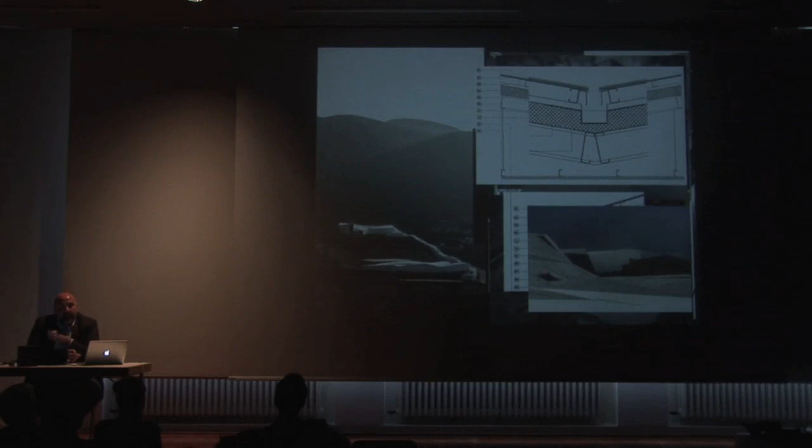One of the reasons I have this image here today is the same reason I was positively surprised by your first-year students having this kind of relations. This is part of the inspiration that brings us here. For me, for us, architecture is always jumping back and forward from the little detail to the whole project and how this relates together. It was refreshing and surprising, because we don't do it in Porto in the first years. In a lot of the projects I saw this afternoon, students in the first year already have this understanding of architecture, which is very important.

Another building that I pass every day for sure inspires us, for sure we will look at that, and for sure I have a lot of critics about this building. It's in the Avenida da Boavista, between my house, my school and my office. We have learned, like I said to the students, we learn from everything in the city if you want it. So we get inspiration there, but we can jump to completely different places.

I won't bother that much with the energy efficiency of this building, but the constructive system here is very different, for different reasons. Part of it is that human bodies produce heat - training, going to a gym, especially if you are Olympic athletes, you produce a lot of heat when you are doing it. So the problem for the white parts of the building, the sports zone, is to dissipate heat.

When you are in your room, you must remember that Olympic athletes have your age, the peak age being around 19 to 20-something. They are also university students, so the life of a high-performance athlete is to train and study - 8 hours training, 5-6 hours studying. The rooms are designed very specifically. When you are quiet, like I am here now, not at the gym, the problem there is not to dissipate heat, it's to not lose it.

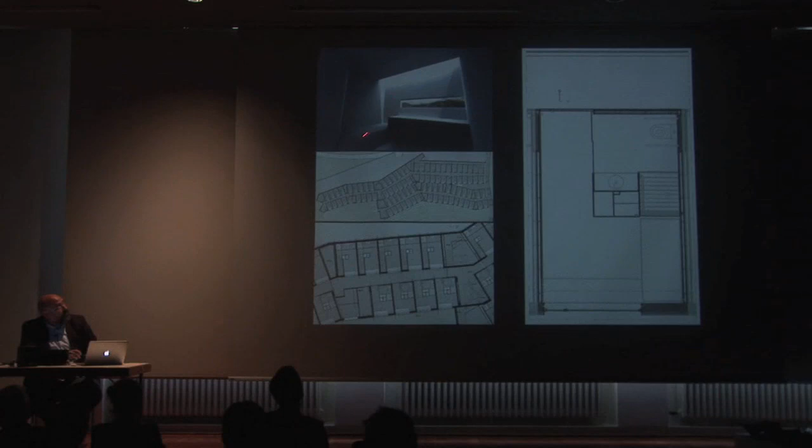We've been talking about the framing also today, with the framing of the other side of the valley, and the relationship with the space. So with this kind of windows and skylights, although the room is very small, you can have long views. You can see the sky from all beds, and you can see the old side of the building, the other side of the valley.

So this is something between the renders, working renders - these are not for selling any real estate. These are working renders and the constructed results. Again, going back to this afternoon, trying to understand how we're going to build something that is not yet built.

So this is mainly the part of the rooms of the project, and this is the other room in the upper part, at the same level, the lower part. Here you're going to see in a moment, because we have these stepped terraces, you're going to enter there.

You have the stair that brings you to that part of the building. So the room is similar, same principle of organization: one furniture that organizes the whole space. There we can put the restroom, because with that we also have natural light to the restroom from the continuous skylight.

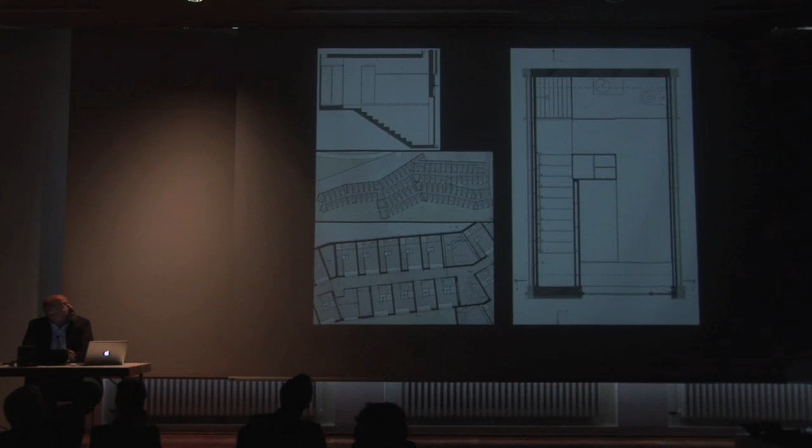So this is a small section of that. You have the stairs, and that skylight you have seen in the previous project that is above the desk, the study. We can also have natural light for that restroom, bathroom.

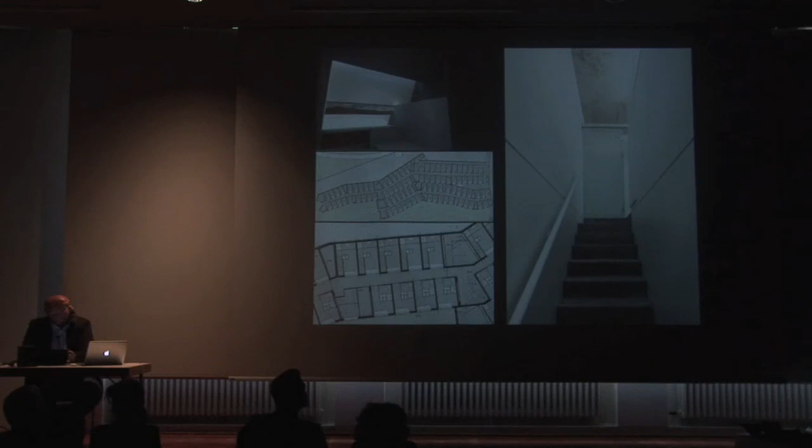So this is a render from the project of this room, a picture of the constructed building. And then again, renders from the beginning where it can be seen: the corridor level, the relationship to the lower rooms, the stairs to the upper room.

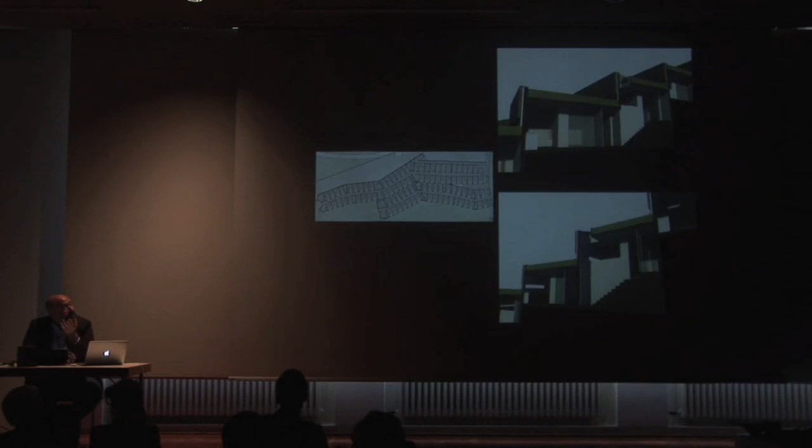I have chosen this image on purpose for students. If you noticed with attention, the skylights are still changing. We are still researching what we want to do with this project, so we are trying different things. The 'what if' that I told you before: what if the skylight is not continuous, or if there are some squares put in specific places of the rooms? What if?

And then again, like I said this afternoon, we look at this and say, too much, we don't want this. But for me, to reach this conclusion, I need this process. I need to draw it, I need to put it again, I need to work it, and then again say, no, this is not what I want.

That's why, an hour ago, Lisa stopped and went back to that drawing where students had the different options for how to elevate the roof from the building. I was connected to this. This is not hand drawing for sure, but it's the same principle: trying to understand what if I change the skylight, what if I use the same skylight but move it from one side to the other, what is the relationship with the space, the geometrical space, the light space, everything that goes there?

So in a sense, this is similar to the drawing we have seen today. At the end of this process of inspiration, like they asked me, what we decided is that we don't want a mimesis, we don't want a copy of the stepped schistus that were there. So this kind of completely unreadable artificialization of the stepped schistus won in our internal competition, if you want to call it that.

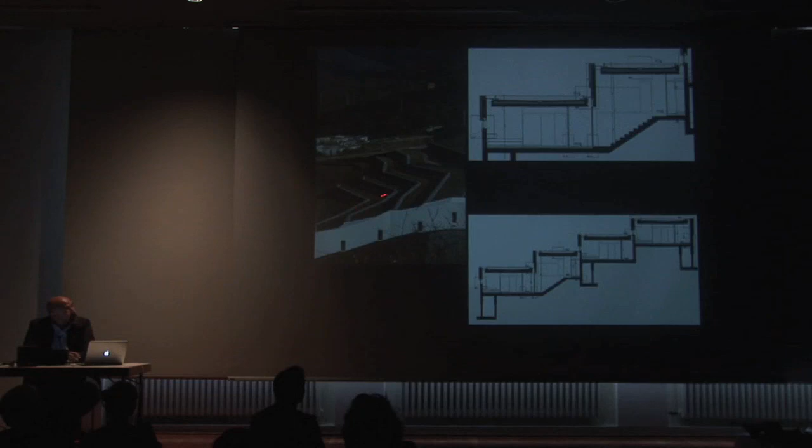So at the end, what we have here is like that example I showed you, that Siza in Compostela is something that is for us related to this place, but clearly contemporary. This is not a pastiche, this is not a mimesis. It's something that we have looked at, looked at history and the place, but we have twisted it to solve our contemporary problems.

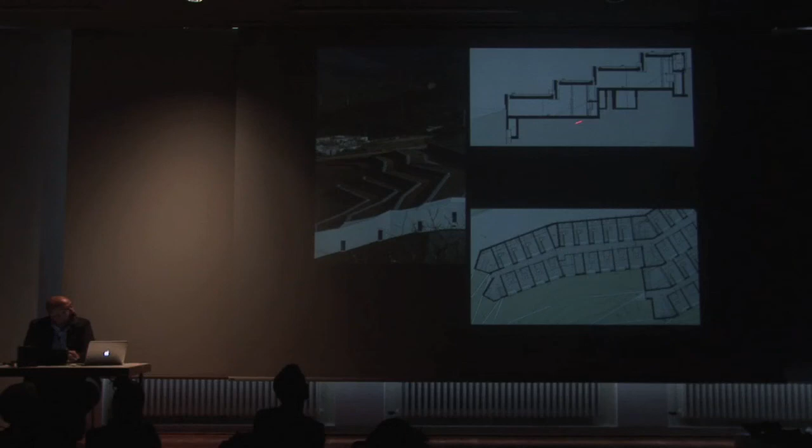So this is a bit the same, the areas that connect the living room, the kitchen, the various rooms, and the relation between them. These are different spaces, a section to that space I told you about before, the relationship between the kitchenettes and the living rooms, the little small social areas here, trying to connect, then the corridor on the upper level to the corridor on the lower level.

It's already been inhabited, so we've already started to have some interaction between people in these kinds of spaces, which has been one of the goals of the project, so I'm very happy that this is happening.

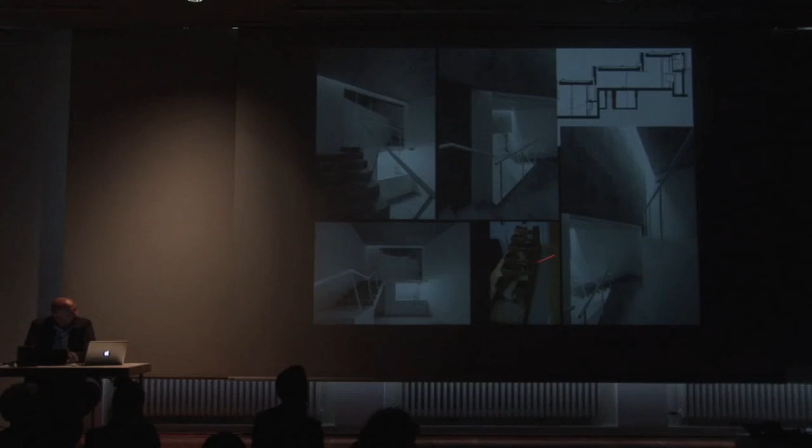And then again, relating to teaching architecture and to the things we don't show when the project is finished, the models we did just to study this relationship—it's not for presenting anything. The relationship of the whole, the body.

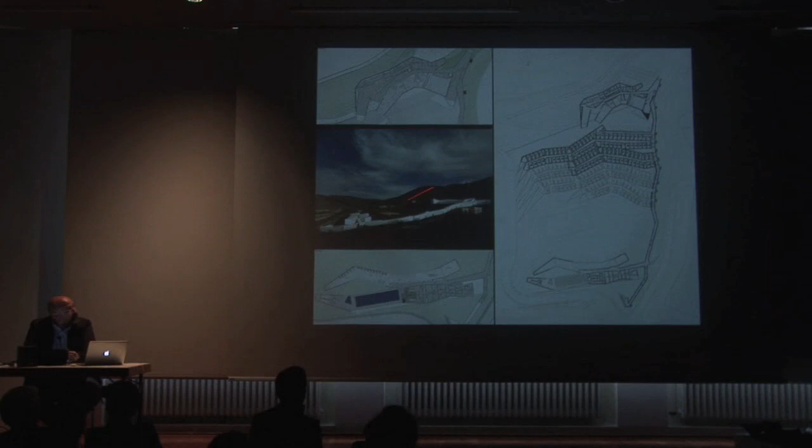And now again to the sports area. The sports area, as I've told you, is this part that is very compartmented, with the team reuniting rooms, the medical rooms, the restrooms, and the laboratories appointed to the pool and the relax area, and this very long gym.

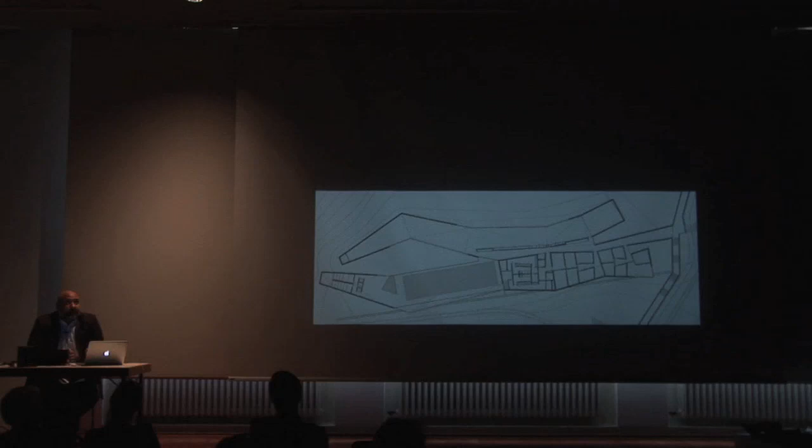This is the newest thing in this program, because I told you in the beginning, what the hell is a high performance center? Well, it's a hotel with a gym on steroids. The program is not that different.

Then we've looked at hotels. This is a different hotel because people don't spend 2 or 3 days here, they spend 2 or 3 months. So there are some differences, and we have a bigger gym. So the program is not that new.

We can relate to other projects and try to understand. But what we tried to do here—this gym has some particularities, because a gym in a hotel or a commercial gym doesn't have this kind of secrecy that exists here. Because if the German rowing team is training legs there, they don't want to see, and don't want the Russian team to know what they're doing with arms there.

So this kind of twisted shape also comes from that. It comes to how we can work in the same space, because there are efficiency gains to having just one space, and this shape also relates to our work with the coaches here.

For those of you who do gym—not me—you know you have machines for legs, machines for arms, machines for core, machines for everything. But here, mainly, you have rowing machines, I'd say that's the biggest part of their training.

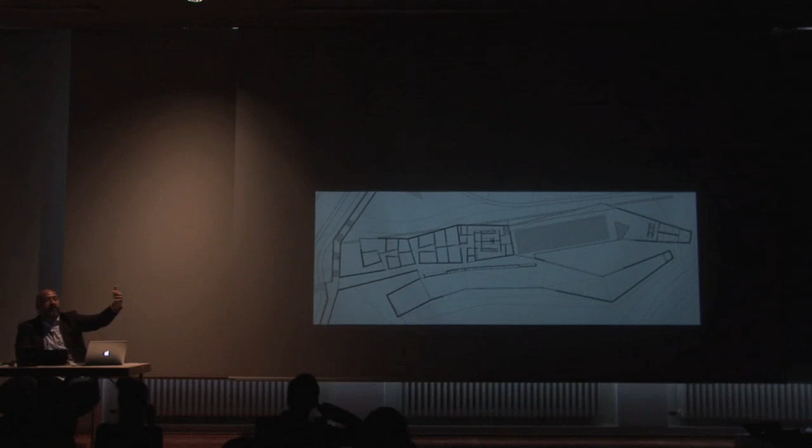The other thing is the shape that goes there, and this big window that looks south is the only window that faces south, because this hill is facing north. That's why we were able to put these very big windows in the living room and the dining room, but this is one of the few windows facing south.

And I already told you they have like 40 degrees in the summer. So this shape in section—you can see the projections there—is also drawn so that in winter, when the sun is lower, you have direct sun through those windows, but in summer, when the sun is higher, the shape of the building shades the windows, so you don't have heat gain there.

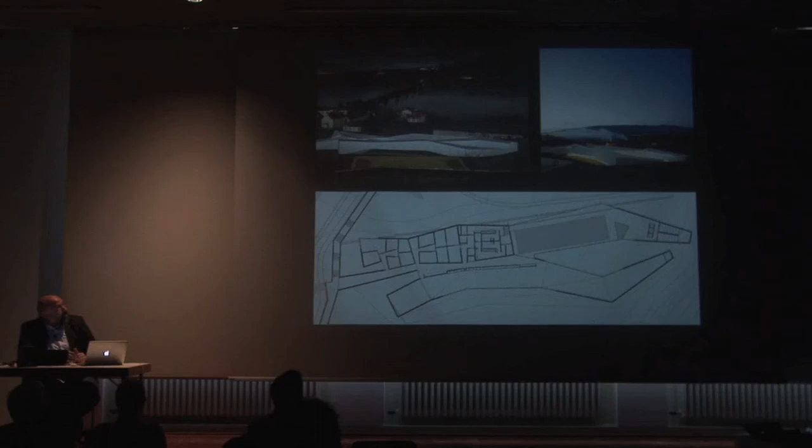You can see a little bit there, so the building shades itself and relates to the gym and the other parts of the sports zone.

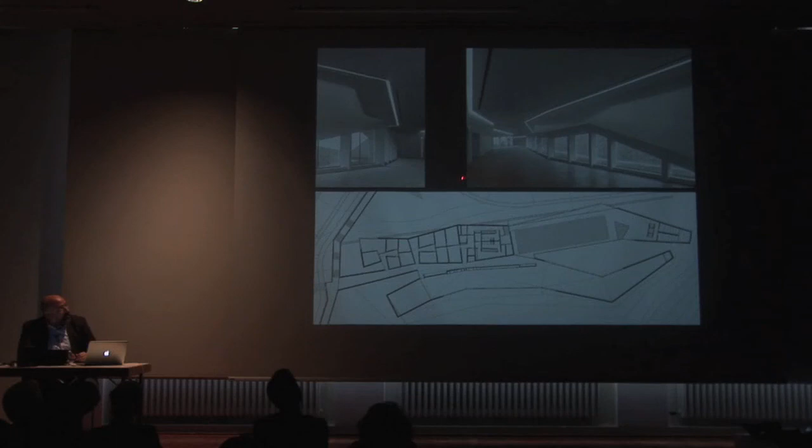So then again, what we tried to do here is, within the same space—in quotation marks—have different spaces that come from the variation in height and the variation in plan.

Very quickly, to end this presentation: the parts with the social areas. There you have the entrance to the building, which goes into the lower level of the plaza. This is the reception area, and you can go up one level to be in the auditorium.

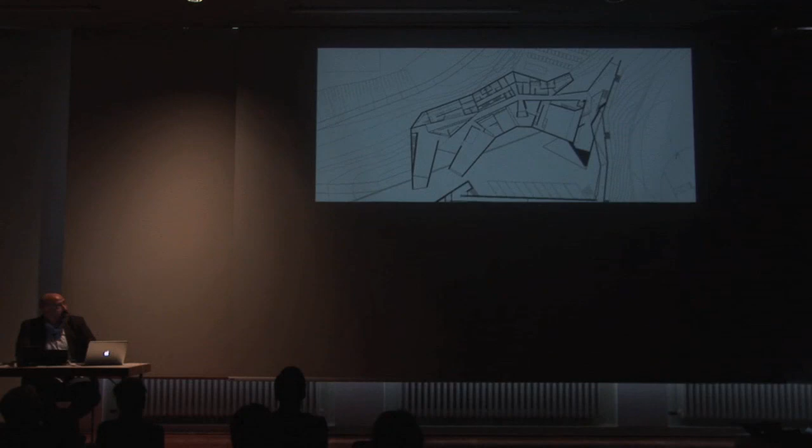The administrative parts, like the president's room, the secretary, the meeting room, since we don't have that many meetings there, we have put it in relationship with the stage of the auditorium, because it can work as backstage when needed. A little library and research room, the living room, the big dining room, because again it's a pressure point in the program—in the gym you can have different schedules for different teams, but with meals you can have a little flexibility, not that much. So this is one of the biggest spaces, because you need to feed all these athletes in at least three changes of tables. A little bar and esplanade in the middle, and against the hill, just the services—kitchen, laundry, bathrooms—to support the relationship with the auditorium.

This kind of balance, we have already talked today a lot about balances and structure and how to put things there. This balance was not a desire to say 'oh, I can do a balance, look at me.' This is important, I believe, for students—it's there because we tried to put some tension in that place, because it's a special moment in the approach of the entrances. So we put the tension in the plan with this twist of the building, and also, it's like a first gate for the entrances in the building.

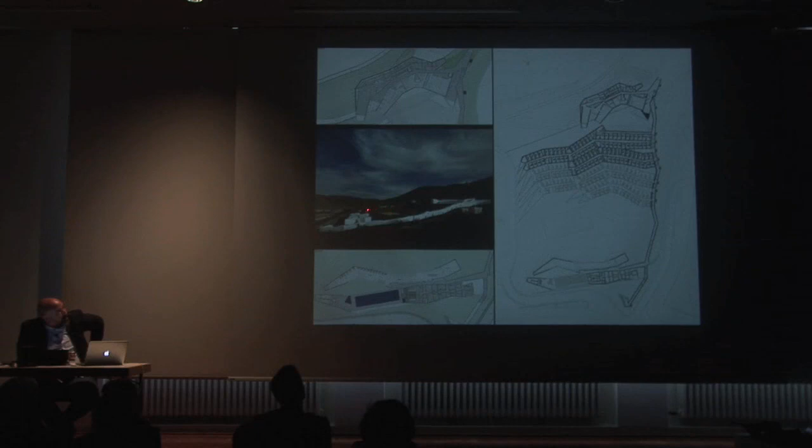The other one, I don't have the section here, but it takes a long time to study—in these two places that are very symbolic of this project, you can see all of the building. From there you can have a perception of the whole building and not be obstructed by the rooms. So this serves a specific purpose in the project and is not just a structural whim of the moment.

In relation to what I just said, this is one of the few spots where the shale goes inside the building. It tries to connect and convey to people: this is the entrance, come here, and this is the continuation of this big building. This big wall comes inside the building and marks and represents the entrance. It assumes particular importance in the structure, the wall of reception with the reception area here, the stair to go to the auditorium, and from there to the other parts of the program that I already told you about.